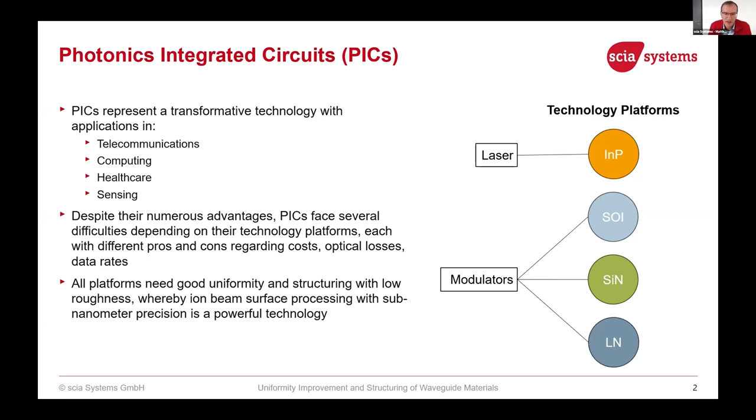But allow me to give some first words on scia Systems. Scia Systems is a specialist in thin film process equipment manufacturing. This equipment is typically based, in our cases, on ion beam processing technology and plasma processing technology. We have customers worldwide. We are existing since 12 years. We are based in Germany, in Chemnitz, and we had a revenue of about 100 million last year.

Our main markets are in MEMS, especially in the RF filter manufacturing business for the mobile communication. We have markets in augmented reality and in high-end optics. Words like EUV lithography optics come into the game. And we look into this new topic of photonics integrated circuits as well. We have a global sales and service network. And we do a lot of technology and process development in-house. So we do not only sell equipment, we sell complete solutions to the customer.

What we are talking about, photonics integrated waveguides. The performance of such waveguides typically depends on some properties. We have some requirements. So we have special material, nonlinear optical material, lithium niobate or aluminum nitride, aluminum oxide, all these names already were mentioned. We need to optimize the light transmission in such waveguide material. We need to take care of the dimensions that have to fit to the wavelengths we want to transport over that waveguide. So that brings me to topics like lowest losses for total reflection, lowest absorption, low scattering, and of course, high yield on wafers.

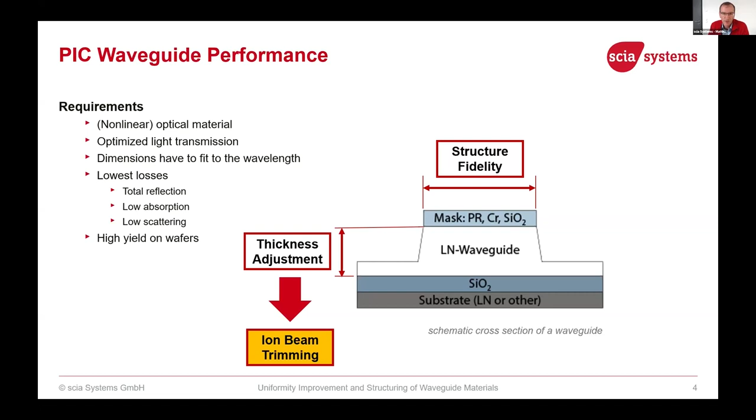And so I have highlighted here two main parameters we are able to control. One is the thickness of such waveguides, and the other one is the structure fidelity. First, I want to switch to the ion beam trimming technology that addresses the thickness adjustment. Short introduction on the principle of ion beam trimming.

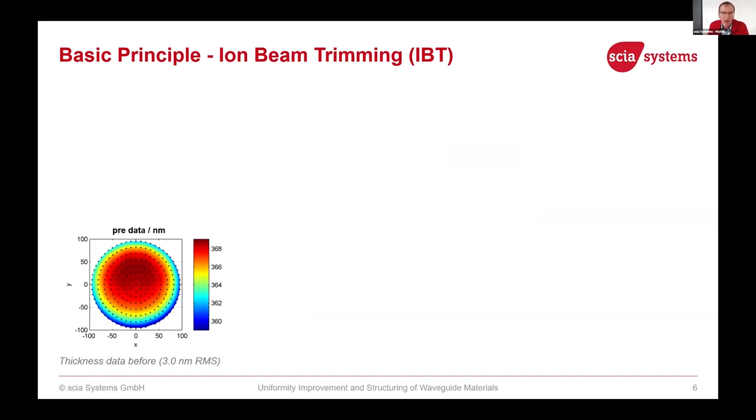So imagine you have a wafer, let's say a 200 millimeter wafer with a certain film on it. And the film has a thickness variation. The thickness variation can be pretty low. Here in the example, you have a variation from 368 to 360 nanometers, so just 8 nanometers variation. Sounds pretty smooth, but nevertheless, it may not be sufficient for your application. And therefore, we developed the technology that is called ion beam trimming.

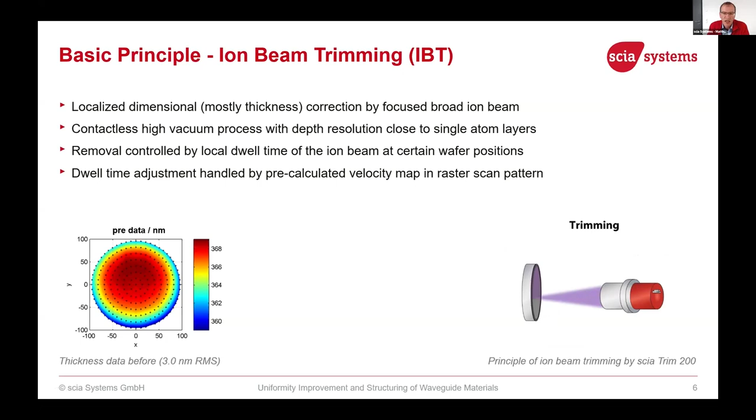In the ion beam trimming, you see it in the schematics. You move a wafer in front of an ion beam source, a broad beam ion source with a focused beam, and you remove material on certain positions. It's a contactless high vacuum process with a very good depth resolution, close to single atom layers. The removal is controlled by local dwell time of the ion beam at a certain wafer position, and the dwell time adjustment is pre-calculated and then transferred into a velocity map for this raster scanning. We can also tilt our substrate to a certain angle to achieve certain improvements.

And finally, what you want to achieve is a very uniform film thickness distribution or property distribution of your devices, if you have already devices on that. Like shown here on the right picture, we improved in this example the variation of 3 nanometer RMS down to 0.13 nanometer RMS by this ion beam trimming technology. This is one nice example.

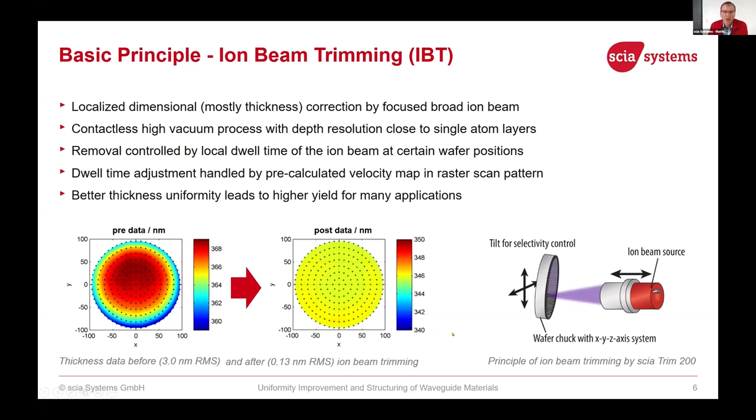This can also be applied to waveguides, for instance, for lithium niobate waveguide trimming. Here you do this trimming before you structure the waveguide, so just the bare film material is trimmed to a certain uniformity. This can be applied for POI wafers, so lithium niobate or lithium tantalate on silicon, for silicon nitride films, for silicon oxide films, or silicon films on silicon oxide, so SOI wafers. All these materials can be trimmed. Even other materials are trimmable with that principle. We achieved there uniformities of 0.1% and better.

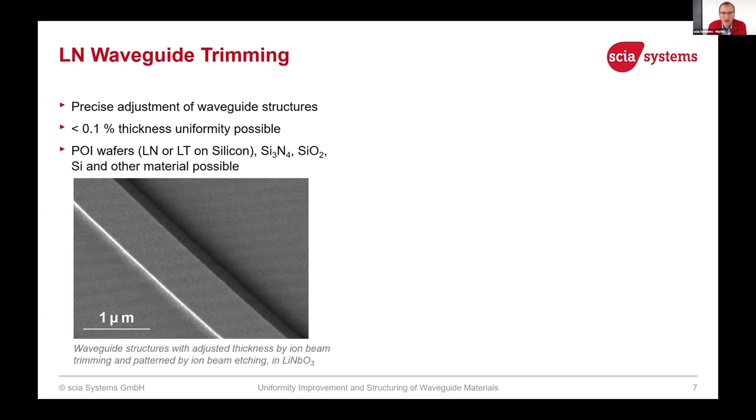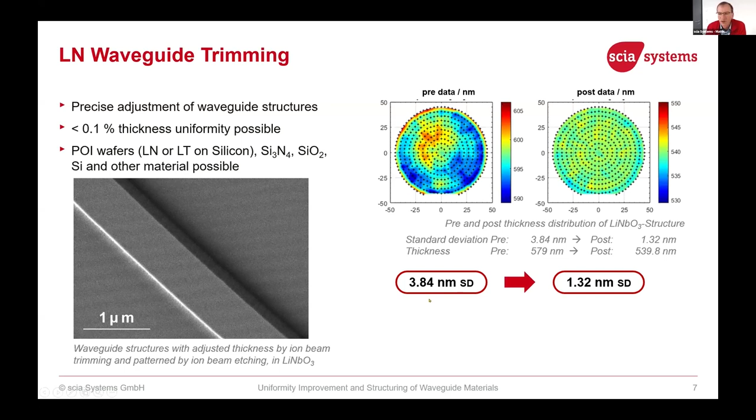Here are some nice examples of lithium niobate trimming. So you see the pre-data in the left picture with some variation in the thickness, with a standard deviation of 3.84 nanometer, and this could be trimmed down to 1.32 nanometer standard deviation with our ion beam trimming process.

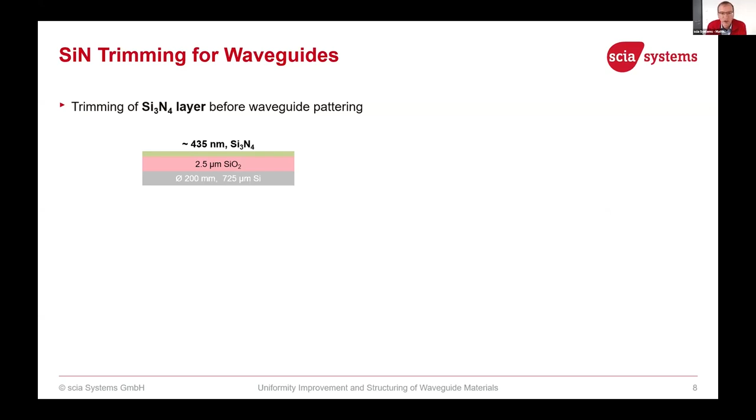So here are the values. So we decreased the standard deviation from 4.8 nanometer down to 0.3 nanometer, really atomistic level, what we achieved. And I also like to mention here two other properties like the RMS roughness, where we did not see any negative effect.

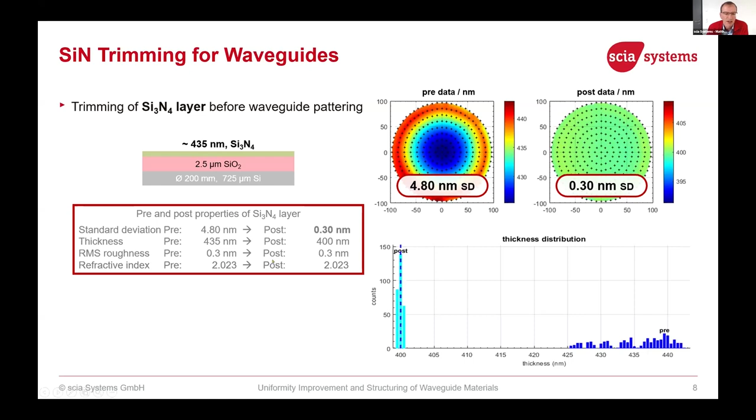So the roughness pre and post processing stayed the same, 0.3 nanometer. And also the refractive index of that material, of the silicon nitride, stayed the same at a refractive index of 2.023. Post and pre is the same. So we achieved the improvement of the silicon nitride thickness standard deviation by a factor of 16. We did not change the roughness or the refractive index, means no increase in optical losses.

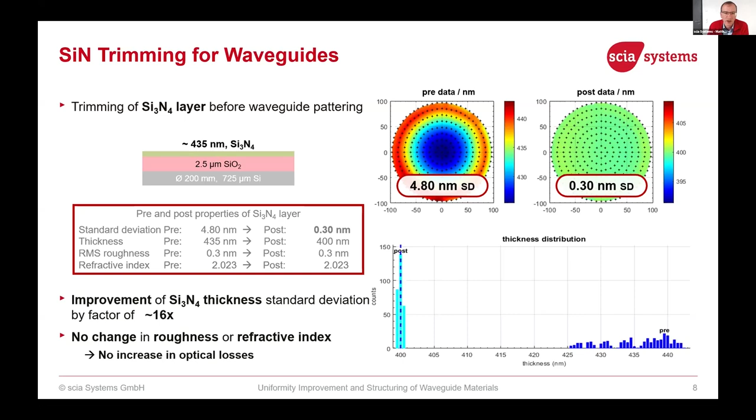And we have there also achieved losses in the range of 0.14 dB per centimeter in some customer applications, but I cannot show any more detail on this. So here is a tool that is doing this process. It's a 200 millimeter tool, but can also be upgraded to a 300 millimeter tool with fully automatic processing of any film and wafer material.

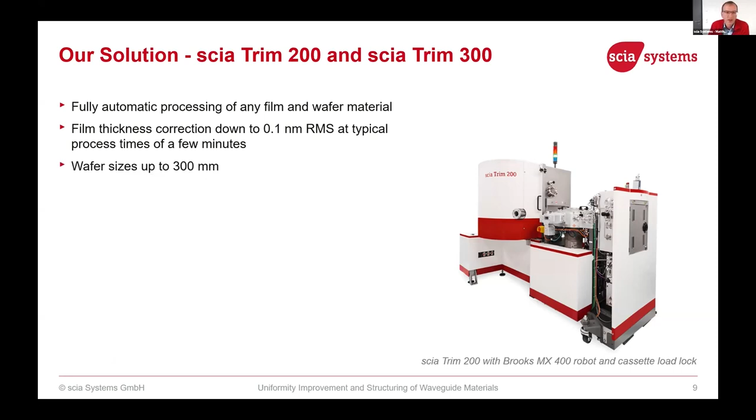The film thickness correction could be down to 0.1 nanometer RMS. Typically, the processing takes a few minutes. Wafer size up to 300 millimeter, I mentioned already. No edge exclusion, since we have an electrostatic chuck that exposes the full wafer surface to the process.

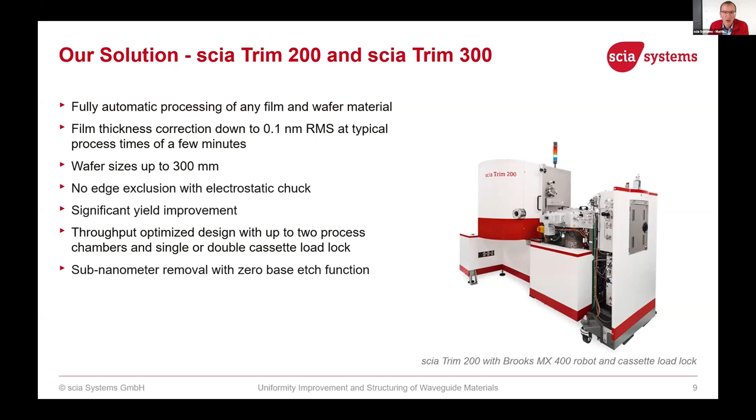And with that, you can achieve a significant yield improvement, and a throughput optimized design with two process chambers is also available for high throughput manufacturing demands. But we have also R&D versions. We can also apply the technology called zero base etch function, to achieve very, very low corrections with high precision.

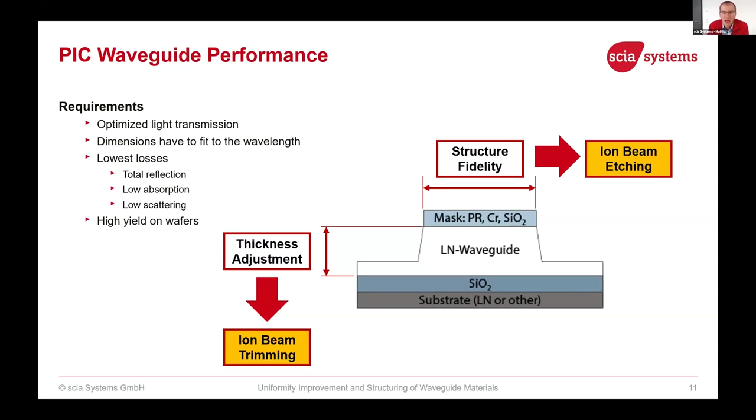And we can etch nearly any material as long as it has a sufficiently high melting point and is vacuum suitable. Even multi-layer stacks can be easily etched, since the physical etch rate is more or less in the same order of magnitude for all materials. We call it ion beam milling or ion beam etching when we just apply noble gas in the ion beam source. So we hit the surface with noble gas ions like argon.

But we can also apply reactive gas in such a process. Then we call it reactive ion beam etching. So we increase the etch rate and some selectivity. And further improvements can be achieved by so-called chemically assisted ion beam etching. That is a mix of noble ion irradiation plus a chemical substance that is fed close to the substrate, to the surface.

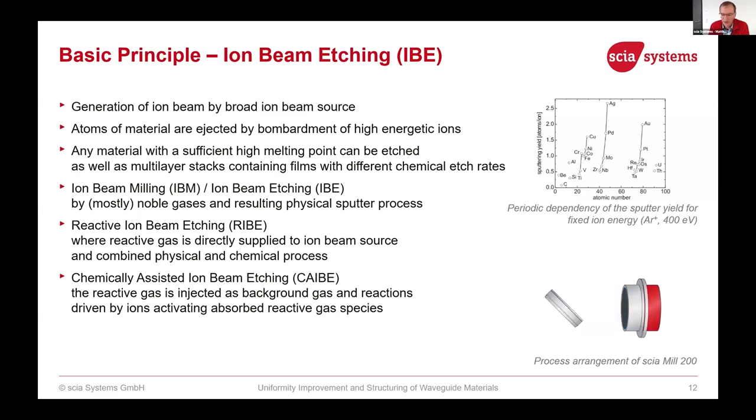For patterning of, for instance, lithium niobate waveguides, we have some requirements like smooth sidewalls, and the sidewalls should be free of redeposition. And therefore, we have a two-step approach. In the first step, we etch perpendicular, means we etch from the top through our mask into the lithium niobate and create the waveguide while we rotate the substrate, the wafer.

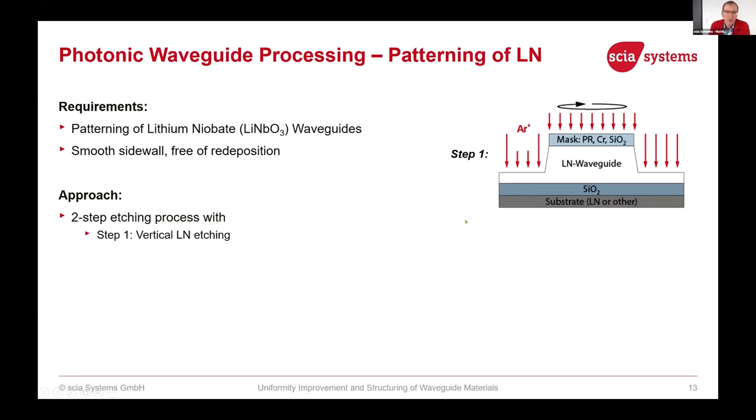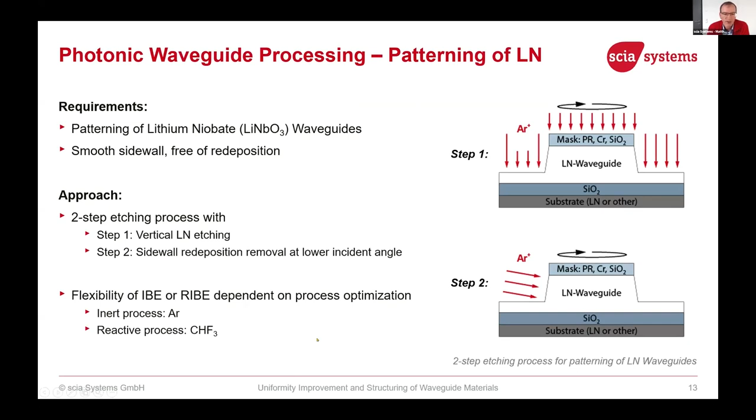And then for keeping the sidewalls clean, we tilt the wafer to a certain angle of, let's say, 70 degrees. And then we hit this side of the structure with an argon beam to clean it up. So, of course, in different times. The first step is a long etching process, while the second one is just a short cleaning flash. And we apply a mix of noble gas and reactive gas. So we apply typically the reactive ion beam etching process flow with CHF3 as a reactive process gas.

Here are some examples of what can be achieved or what can happen also. We see here a waveguide that should be structured through a photoresist mask with a requirement of 75-degree sidewall angle, or larger than 75-degree sidewall angle, of course with low sidewall roughness and no redeposition. But the challenge here was that the photoresist was thermally unstable, and so the mask reflows and shrinks. What you can see here in this SEM photograph, the mask doesn't look pretty well.

And we developed a process combining resist bake out plus a very improved cooling during the processing and a partially reactive process, and achieved a nice etching of a lithium niobate structure, what you can see here in the SEM picture on the lower right side.

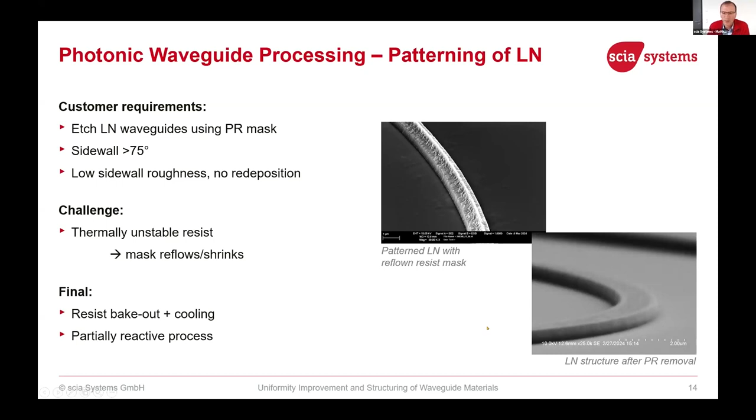Yeah, the tool where this happens is the scia Mill 200. We have also the 300 millimeter version available. You see here the picture of the version with 3 process modules and 2 load locks, so high volume manufacturing ready. We can process wafers with photoresist masks or hard masks. We have good cooling. The etching angle could be adjusted with a tiltable and rotatable substrate holder, as mentioned before, up to 300 millimeter. We optimized the system for high throughput with that robot system and multiple modules. And we have also versions as a flexible tool for R&D and startup companies with just a single load lock available.